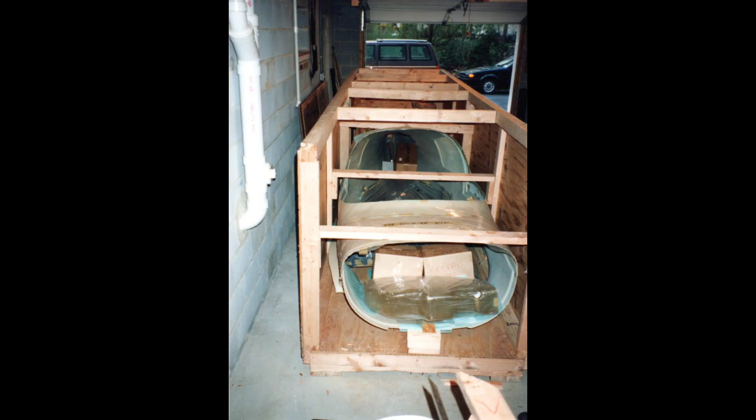So here I am. It's been a couple of decades, a couple of degrees, a couple of kids, and I bought my first Lancair kit. Actually, I bought two kits in January this year, and my early videos showed the journey and the saga from bringing that home, and you get to watch my progress in documenting the airplane and the design modifications and discussions about this famous aircraft, the Lancair 360, that is no longer in production. So during the videos, you're going to be learning about composites and building this amazing super fast airplane.

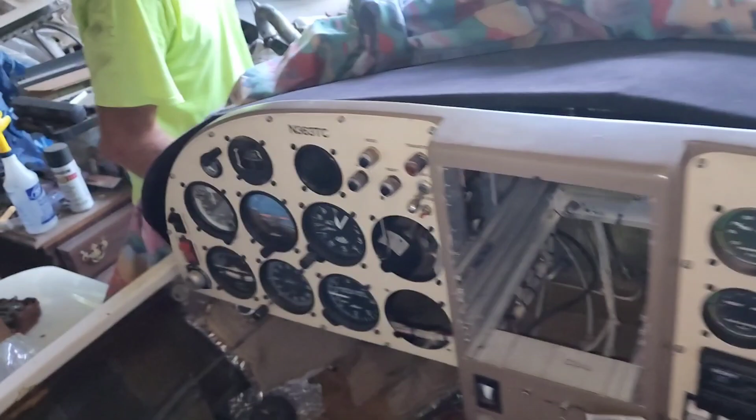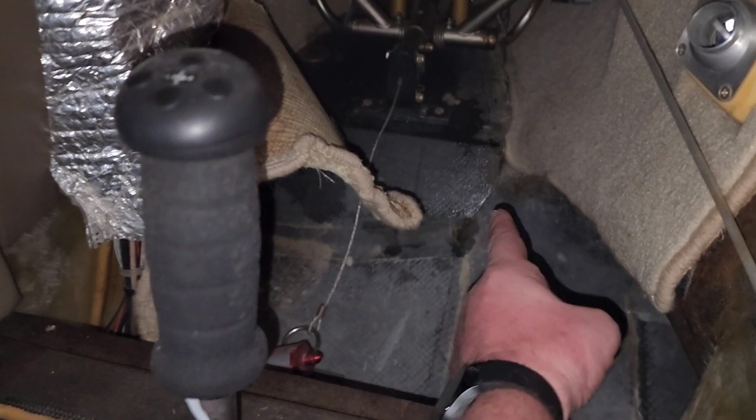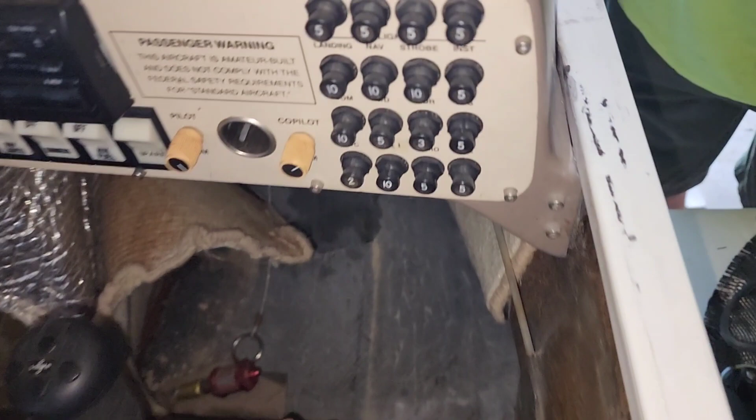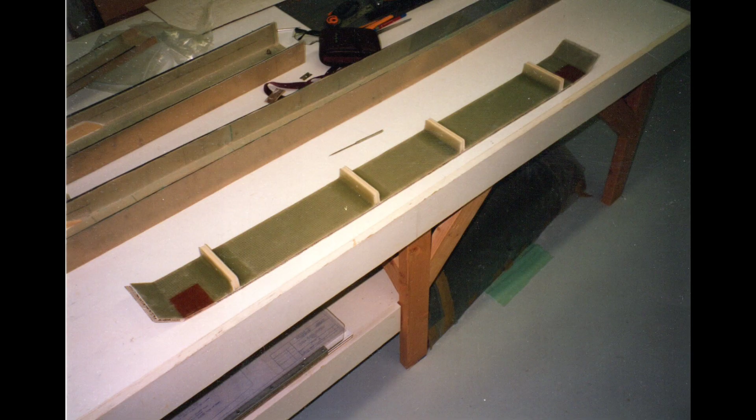But this is a challenging project, and if you've never done anything like this, it can be pretty difficult to do. So I'm hoping that with the videos I can create some excitement around this vintage design that is considered by many in the aviation community to be very much like a Ferrari of the kit plane industry. And if you follow along and you learn how to build one of these airplanes from me, I'm going to try to be very detailed in my build plan so that we end up with a series of videos that would help anyone to be able to build and fly and enjoy your own airplane.

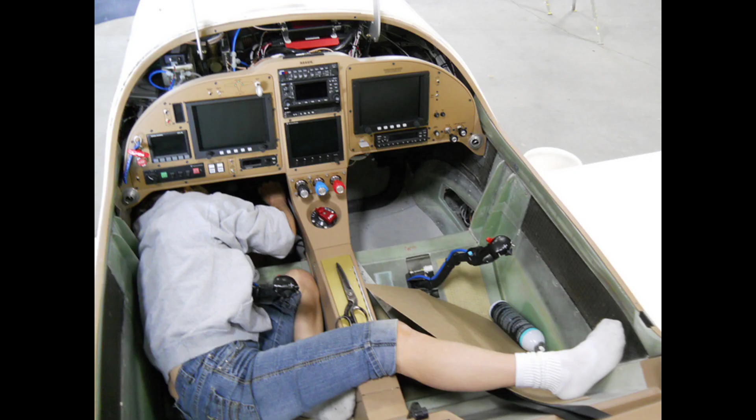One of the big advantages of building your own aircraft is the cost standpoint. It's considerably cheaper to build the kit, but beyond that, because it's an experimental and you are the builder, you are also allowed to perform all of your own maintenance. So that may be intimidating to some, but you can always have an A&P just look over your work. And this means you can cut down on the cost of flying immensely.

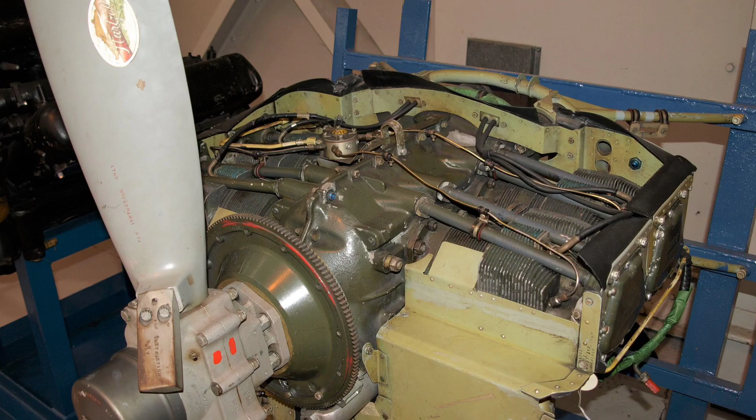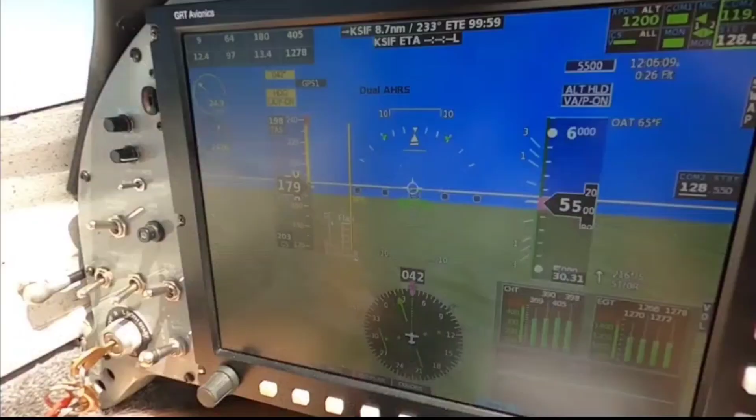And something else that's fantastic about the Lancair 360 is that this aircraft can fly with an O-320 sized engine or a 360 sized engine. And it gets incredibly good fuel efficiency going fast. You can easily get this airplane to fly on about 7.5 gallons an hour at right around 200 knots. The bigger engine obviously has a little higher burn, and people get cruises in the 210 to 220 knot range. And with the 320, if you throttle back, somewhere closer to 180 knots on about a 7 gallon per hour fuel burn. These figures are not exact, and it really depends on how you build the airplane, how true it is, if you have gap seals and lots of other little nuances. But generally, this is an amazing aircraft.

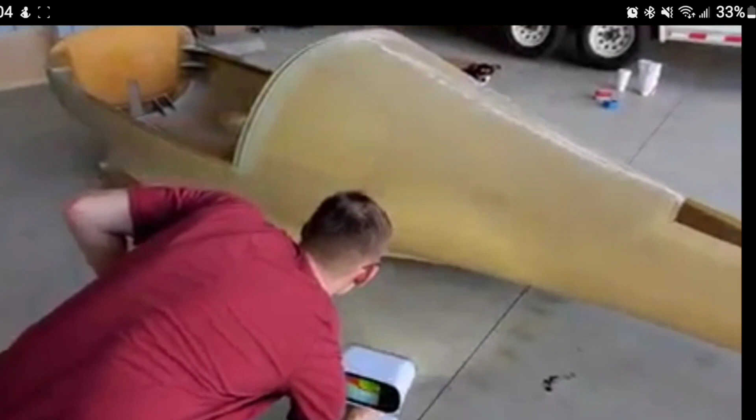My last video covered a high-level overview of 3D scanning using the Creaform HandySCAN Elite Black. For those of you who have been following along, I first scanned the aircraft with an Artec Leo 3D scanner, and I thought at the time that was going to be the right choice for this aircraft because of its portability and some other features. But that turned out not to be the case. So this video is the second part of a two-part series of scanning the Lancair and what I've done with all of the scan data.

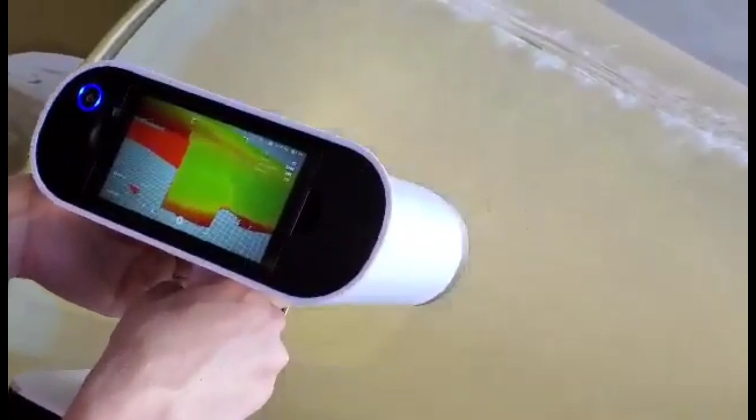So the last video covered how to get the data into the computer, but I didn't spend any time talking about the actual workflow of converting the captured data into something usable in a CAD program like SolidWorks. I also didn't address the fact that the scanner you use and what software can make or break the success of the project. So I'm going to dive into those details.

When I first chose to scan the Lancair, as I stated earlier, I chose to rent an Artec Leo scanner because of the features that it had, and I thought they were important. So for example, the Leo is completely self-contained. It has a hard drive and graphics card built in, as well as Wi-Fi, and does all the data processing right in the scanner. And it even has a screen so you can see what you're capturing without cables. So I thought that was really nice. It's battery powered and you could carry it around, capture all the data. You didn't have to have a laptop.

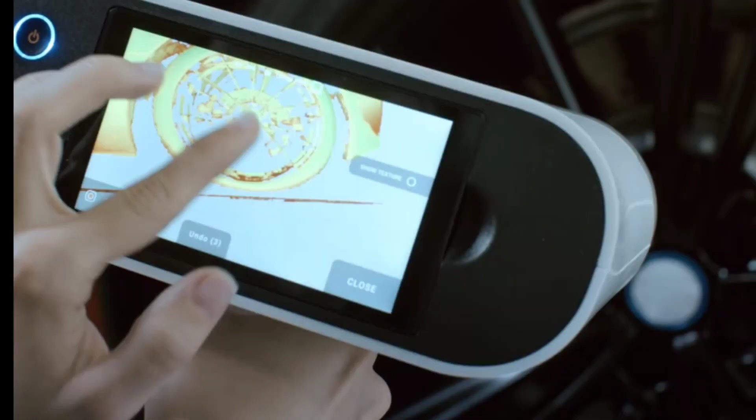And it also captured texture data, which I thought, to be honest, would be pretty cool. And you can see from some of my images here that you do get the data for the images that it scans along with it for the textures. And you can see the serial number inside of the fuselage. So that was really neat. But unfortunately, the Leo proved to have some shortcomings for what you might call metrology grade 3D scanning.

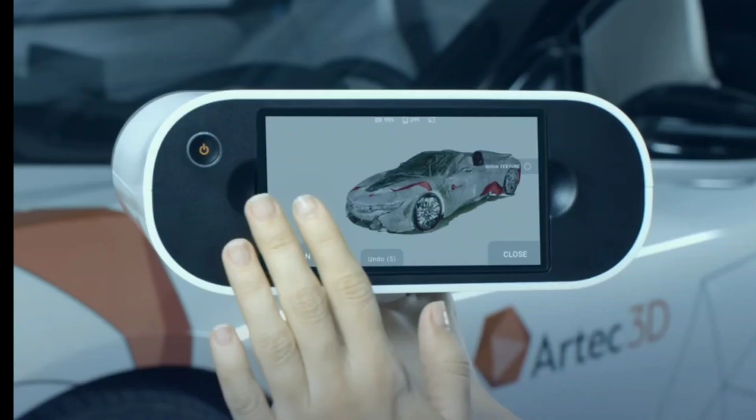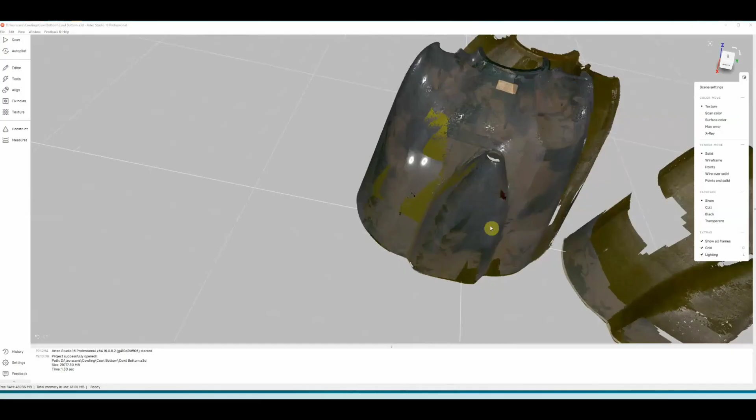The Artec Studio software, on the other hand, was pretty intuitive, but it fundamentally lacked the ability to align all of these multiple scans that I did for the fuselage of the aircraft really well. And that's because the Artec Leo uses texture data to do the alignment. It also turned out that the Leo scanner had something that I can only describe as drift, where it lacked the ability to scan long objects like a wing spar. And that's probably due to the fact that it only uses the texture of the surface that it's scanning in order to stay aligned.

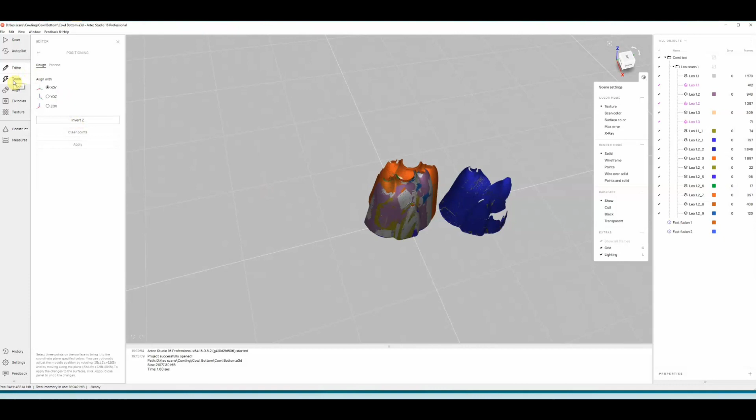It also had a lot of difficulty when I scanned the cowling for the airplane, and walking from one side to the other, it literally lost reference and the bottom half of the cowling was distorted as a result. So what I learned was that the Leo only aligns with the texture, and the software has features that say use targets, but nowhere in any of the videos online or anything said anything about how to use the dots, nor does Artec actually provide anything like that I could find. So it's a little bit of a hit or miss with that.

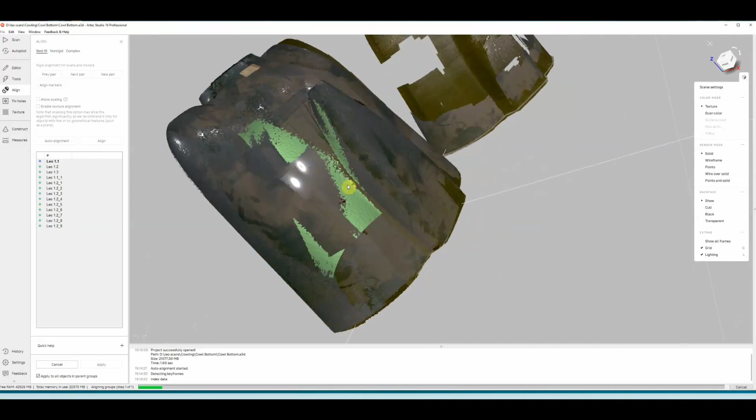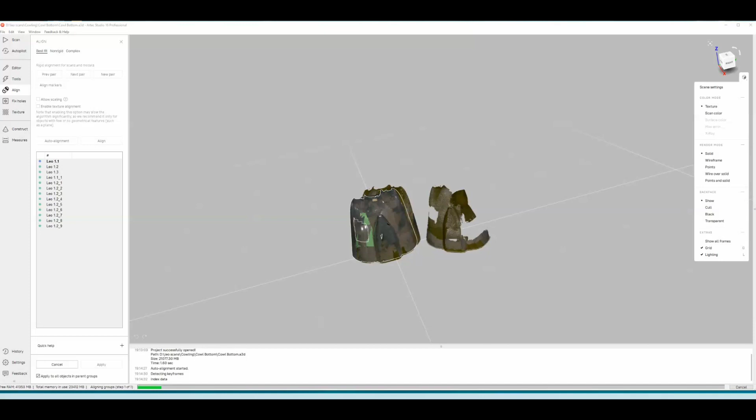And in the end, what I decided was that the features that the Artec Leo had really sounded terrific. Cable-free scanning, wireless streaming of the scan data, a screen to see what you're doing. But in practice, the Leo is good for, in my opinion, smaller objects with lots of geometry, like an engine, for example, or a motor or a heat sink or something like that. Although I did not try it, I suspect that if I used a marker to draw squiggly lines all over the plane, the Leo would have been able to triangulate all those marks and provide better results. But I didn't really want to mark up my aircraft, so perhaps it might also work with targets, but I suppose I'll never know. So that brings me to the software.

The Artec Studio version 16 software is a very intuitive program, but it also has very few bells and whistles. The different alignment methods in the software are a bit cryptic and confusing. As I went through even the instructions provided, I really couldn't make heads or tails about what they really represented. And even as an engineer, a very technically minded individual, I really had a difficult time with that.

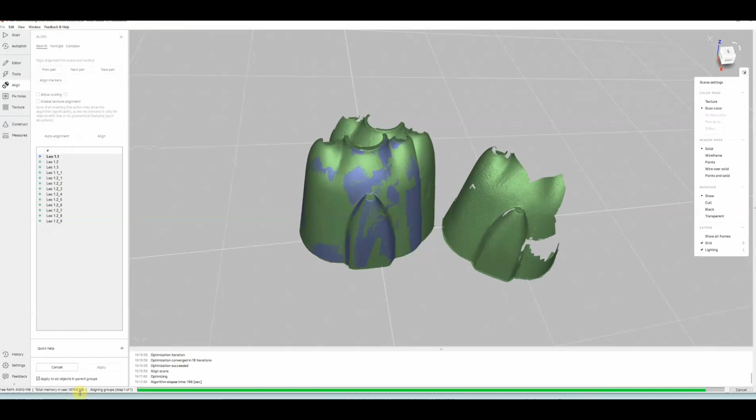And many times during my work, it even made the scan data worse using certain alignment methods that I found in the software. And I had better results manually aligning to get the scans close. And then once you have the scans close, you can click a button to say finish the alignment. And if you get it right or get it close, it'll do a pretty good job of lining them up.

I guess it's comparing all the points that you captured with the points in additional scans. But the bottom line was the Artec Leo or Artec Studio software, I felt like it lacked refinement for workflow, for engineering, and it had challenges when capturing and combining multiple scans.

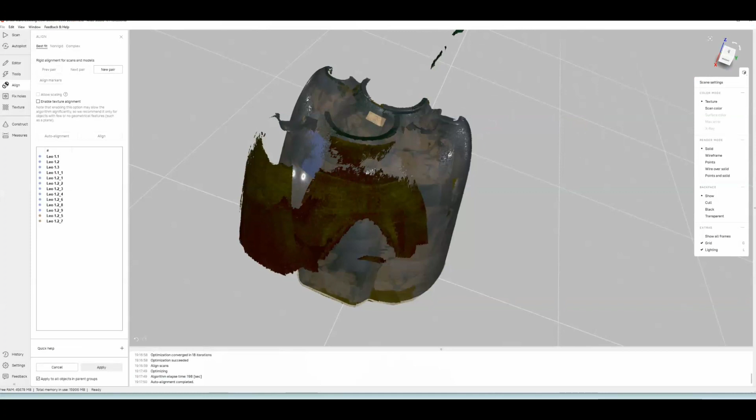And unfortunately, without the use of targets, it loses reference often while you're capturing large objects like the fuselage of an airplane. So I spent maybe a little more than 2 months trying to convert the scan data into something usable in the Artec software before someone online in Facebook suggested that I investigate a Creaform.

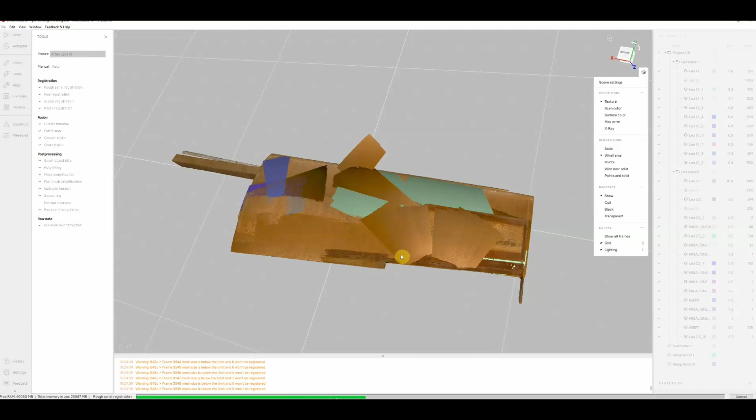In the last video, I showed the scanning process of the Creaform HandySCAN Black Elite, but if you listen carefully at the beginning of that video, I also tried to use the Creaform GoScan before we tried the HandySCAN, and that one also uses texture data, and it encountered the same kind of problems.

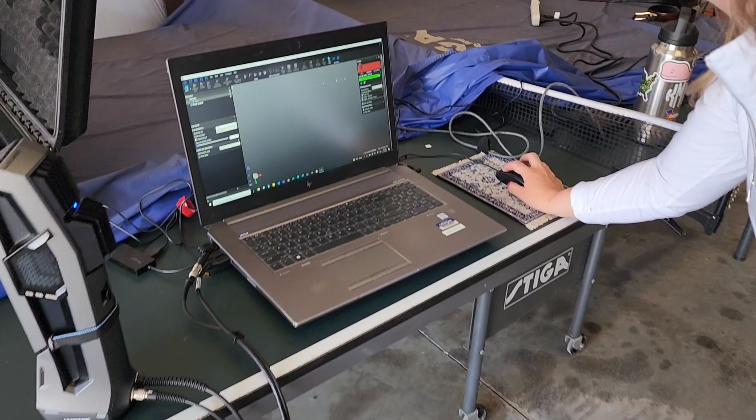And we think, after talking it over with Creaform, that it might be the translucent nature of the fiberglass that actually causes the problem, because the scanner picks up artifacts at different lighting angles by going right through the translucent fiberglass. This was really dominant in the window area.

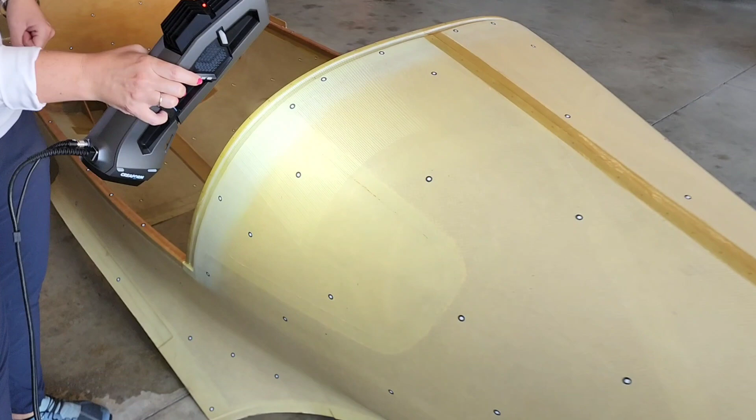We kept getting artifacts when we were scanning, and I resorted to even closing down the door to the hangar in order to see if that would have an impact, and it did. But ultimately, after a bunch of attempts, we had to switch to the HandySCAN, which is a completely different animal, and it's a laser-based capture device, and it's considered to be a metrology grade 3D scanner.

So with that, we basically made the plane look like it had measles with these dots all over it, because the Creaform HandySCAN Black Elite scanner only captures the reference points that are presented from these targets. So they have to be put all over the plane, and they have to be in random patterns so the software can figure out and triangulate strictly off of those.

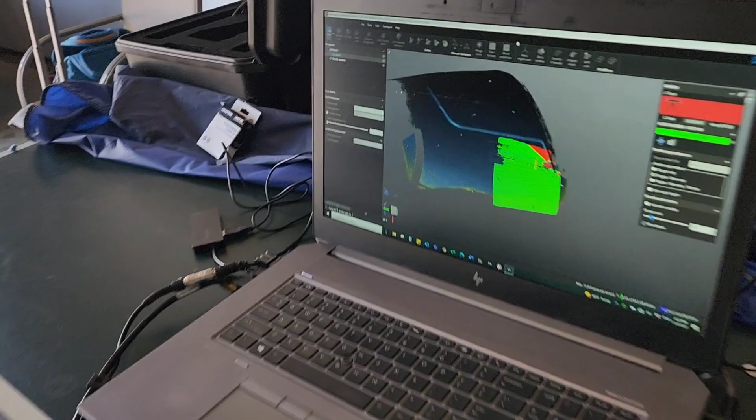VX Studio and VX Elements are Creaform's software for post-processing. In part 1 of the video for 3D scanning, you could see that the results of the HandySCAN Black Elite from Creaform performed flawlessly, and we ended up with a beautiful model that I could use to create surfaces in their software in order to do modeling from.

So VX Studio and VX Elements are Creaform's software version of the Artec Studio software for post-processing the 3D scan data. And as I mentioned, someone suggested that I try this scanner and software because it was far better than the Leo software, especially when it comes to surfacing.

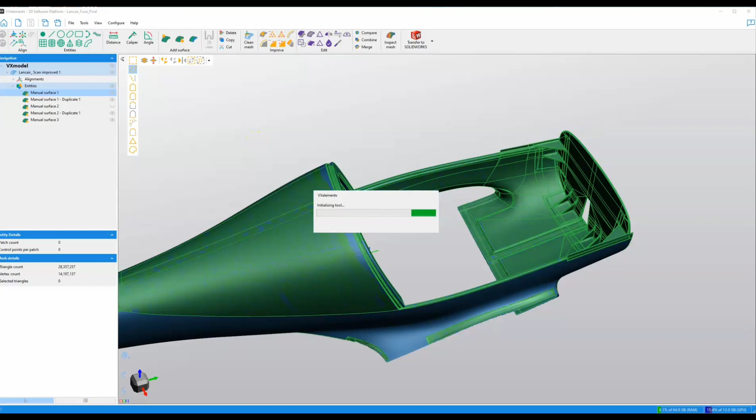Now, surfacing is the process of taking 3D dots in space, which is what the 3D scanners capture, and converting it into a mathematically derived surface that goes through all of those points. And this is required in order to do any CAD modeling off of the model that you capture. So what you end up with is not a bunch of points in space any longer, but a mathematically derived surface that flows through like an average of all of those points.

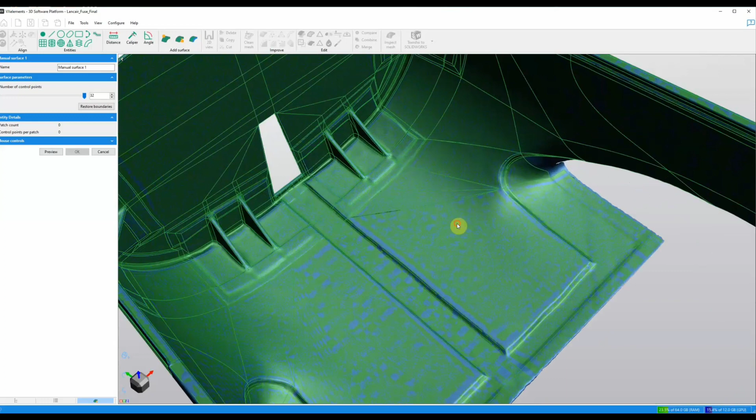And that leads us into the question so many people are probably wondering: why I did all of this scanning. I hinted at this in the middle of the first video, and I'll go into more detail in a subsequent video where you'll be able to see how I used all of this scan data to do customizations on the design. But at this time, we're just going to focus on the software and the post-processing, because I feel like that's something that would benefit a lot of people in the aviation community.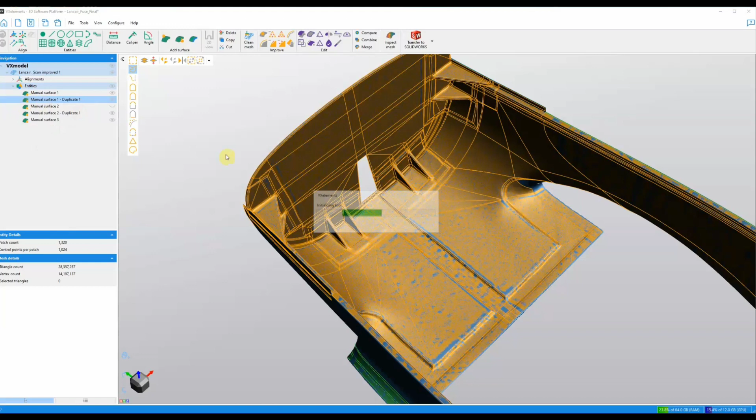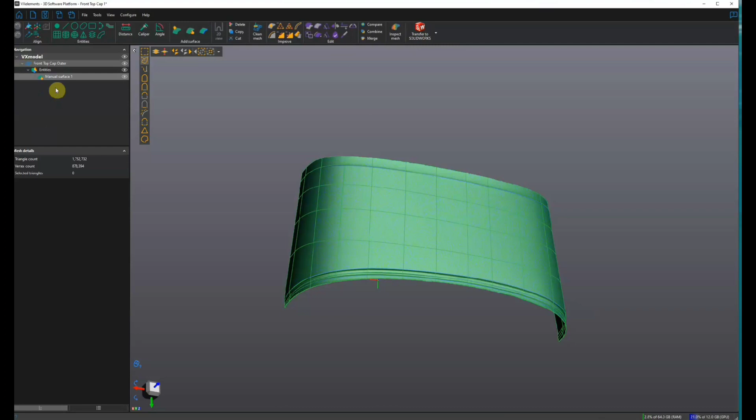So after a short learning curve in VX Elements, I was off to the races creating surfaces. I found that there is a tool for automatically creating surfaces, which I tried to use at first because I hoped that it would create the surfaces that I wanted, but it just could not get the fuselage right. I realized I'd have to use the manual mode because automatic surfacing just couldn't pull it off. It actually creates hundreds or thousands of these little patched surfaces, and it just couldn't manage all the complex curves of the fuselage.

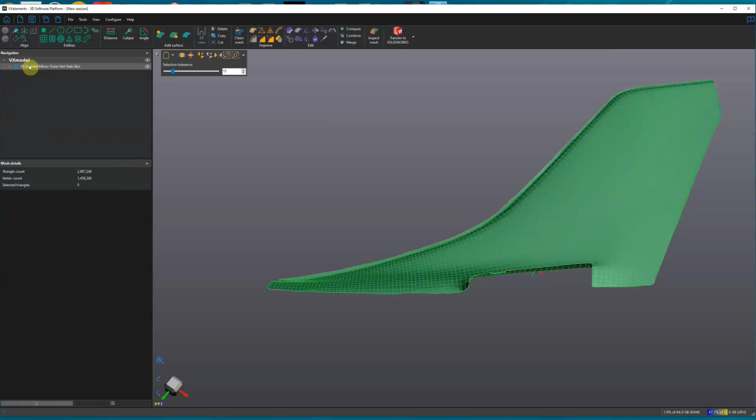So it probably would be ideal for something like a car hood or something, maybe less complex. But scanning both the inside and outside of a complex object like the fuselage of the Lancair, I found that manual surfacing was really the only way to get what I needed. And I did encounter some errors as I pushed this software to do more complex geometry in manual mode.

The problem I encountered with manual surfacing was that after saving my progress, sometimes the software would fail to let me continue. You could exit your progress and then come back in. And even though you could open the file, you just wouldn't be able to drop back into the edit mode where the progress had been saved. And it turned out that I was able to keep moving forward by just duplicating the surface as a new object, but trying to re-edit the old data would just make the work disappear.

So I made Creaform aware of this, and they have assured me that they'll be working to resolve this in an upcoming release. Another amazing feature that I found with the VX Elements software was surface and primitive object creation for reverse engineering. And this is probably useful to a lot of people.

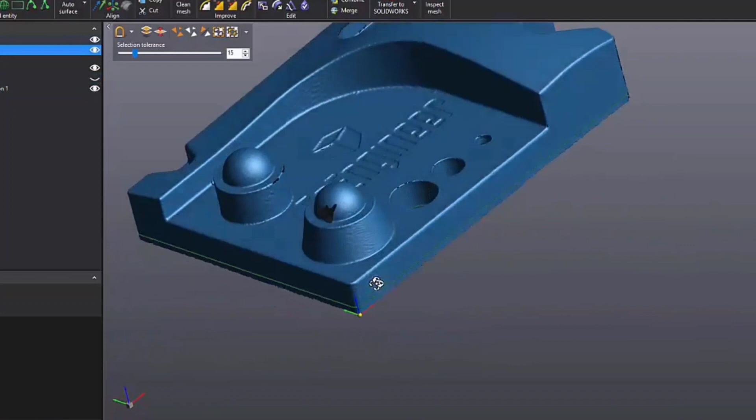There are videos on YouTube that show this process, but I felt like none of them really explain exactly what you do with these tools and how you combine them with cross-sectional data to reverse engineer an object well. So I'm going to provide some examples of how these tools work for scanning something complex like an aircraft.

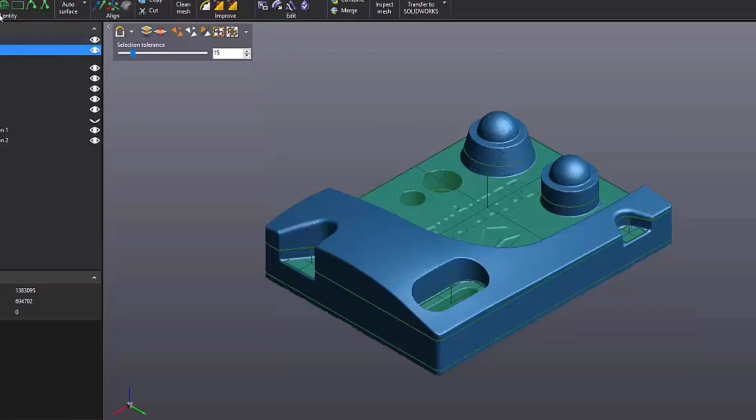So for example, someone recently reached out to me asking about scanning the cabin of a Cessna 172 without the instrument panel installed in order to determine the location and space for all the hard points for mounting an instrument panel. Likewise for door panels and other interior trim. And this would be very easily accomplished with a scanner like the Creaform HandySCAN Black Elite.

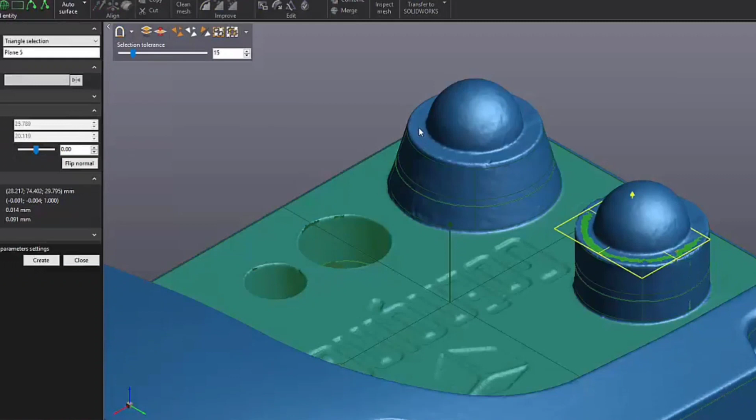And then being able to quickly create planes where those surfaces go for mounting and where bolt holes go, and also being able to create simple objects like tubes and flat surfaces, so to create reference points for the mounting hardware.

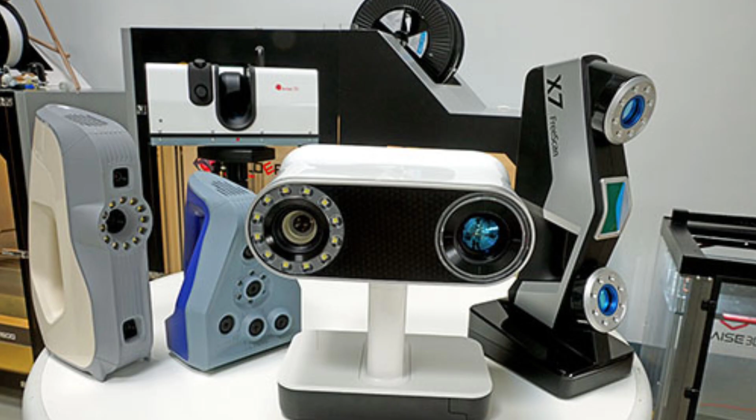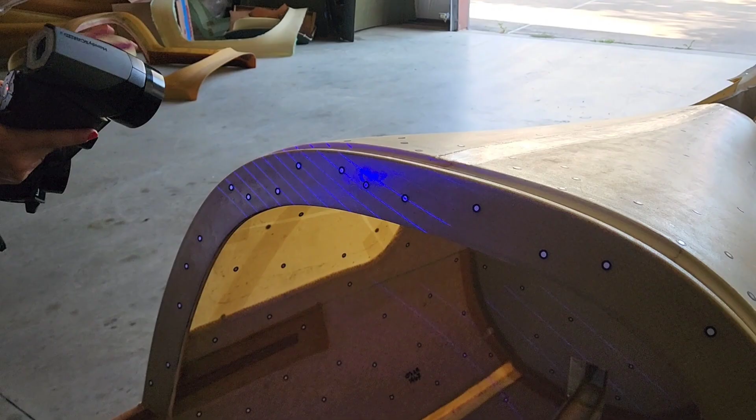So my research and actually doing the scanning led me to understand that there are a lot of different scanners from each one of the scanner providers, and the scanners are all designed to fill certain gaps in scanning processes. Some are designed to capture high detail in very small envelopes like on a tabletop, but those are ineffective at capturing large areas. Other scanners can capture medium-sized structures like the Lancair fuselage or a boat hull.

But they have other models which are designed to capture even larger objects like the outside of, say, a jumbo jet. And even beyond that, there are 3D scanners designed to capture entire buildings or like inside of a petroleum plant, or what I would call architectural scanning.

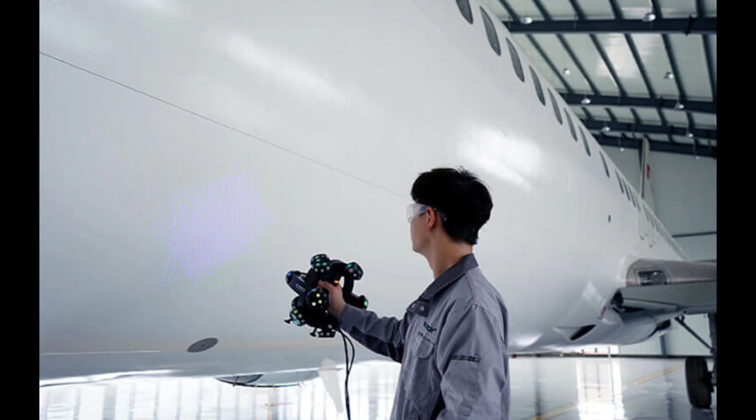So in the end, after all of this, the fun part is that 3D scanners can be rented. Depending on the model, you can usually find them for between a few $100s up to $1,000. The Artec Leo that I first rented was about $500 a day, while the Creaform HandySCAN Black Elite, I think, rents for slightly more, like maybe $600 a day.

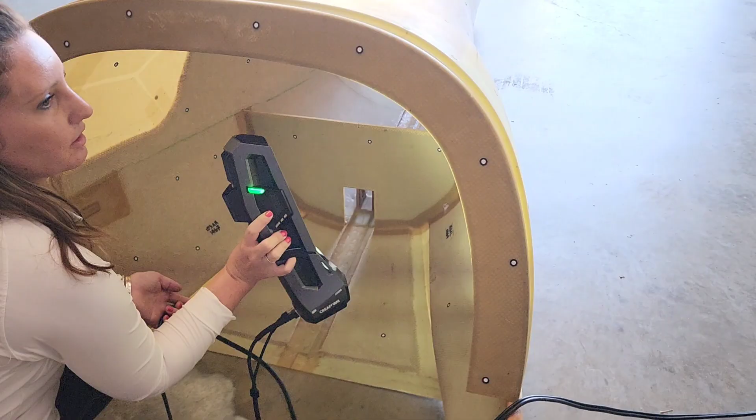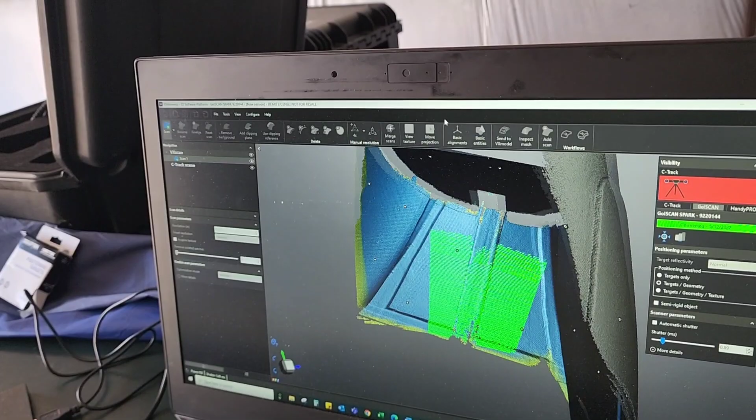And that said, the rental places don't really treat a day like you think. Most renters consider the next day to be the full day. So if you pick up the scanner at, say, 2 p.m. and go start scanning on a Wednesday, you would have all afternoon, evening, and night, and then the entire next day to do all of your scanning. And the company that I rented the scanner from even said that it was acceptable to return the scanner the following day as long as it was there by 8 a.m.

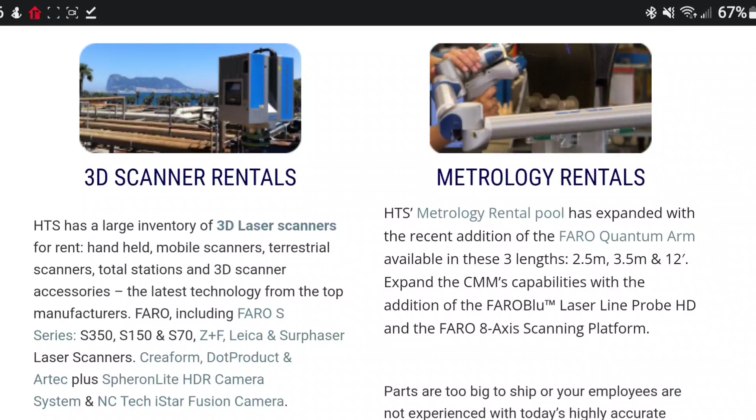So that means you could realistically have the scanner for like 36, 38, 40 hours for that single charge, which is pretty reasonable, I believe. It came out to something like about $16 an hour. That's pretty cheap in my book.

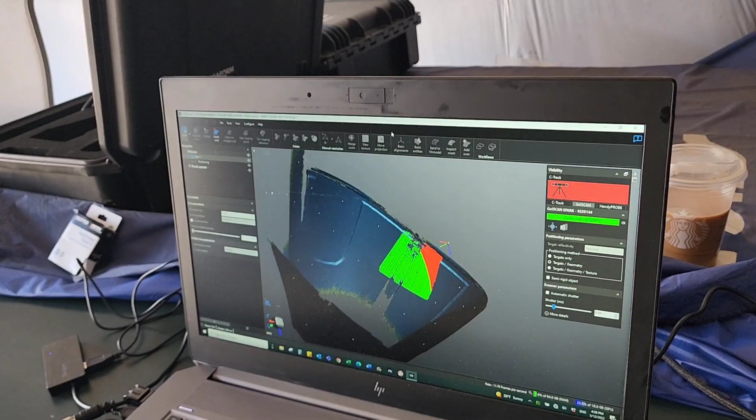So the hard part is that not all cities might have a place for you to rent a scanner from. So you need to locate a rental company. Most places that do rentals will usually ship the scanners out, meaning they can FedEx the scanner to you. It'll likely arrive in a Pelican case along with a laptop that has the capture software pre-installed and the charger cables.

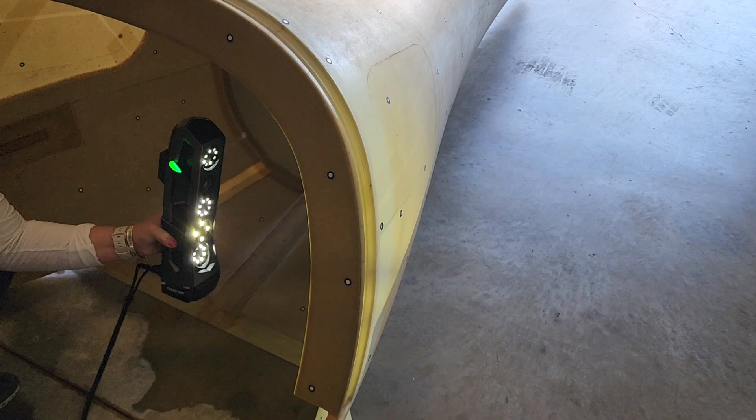And the learning curve really isn't that hard. You could figure it out by going on the internet and just watching some YouTube videos. And the post-processing is what takes a bit more time.

So you should work with your scanner supplier to ensure that they'll give you a license on loan after you do the scanning, so you can install it and post-process the scan data on your home computer. Trust me, it will take some time to do the post-processing. Even if you hire someone to do it, both Artec and Creaform worked with me to have software at home to post-process the data. Otherwise, the rental would be futile, in my opinion, for anything other than very small projects.

So lastly, in my opinion, there's a financial aspect to consider when you rent a scanner. You either get what they call a commercial rider insurance policy that covers the total loss of the scanner while it's in your possession, or you have to take total responsibility yourself for the rental. I think that that's kind of a scary proposition for a $65,000 scanner like the HandySCAN Black Elite, along

with the $3,000 laptop. So this was probably the most challenging thing I worked through at the beginning, trying to find an agency that would do what they call the commercial rider policy for just a few days. That turned out to be really hard. Most of them want to do it for a month or do it for 6 months or a year.

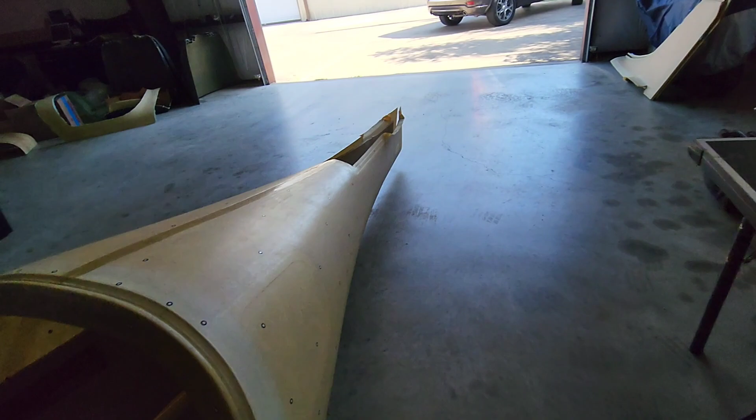But after searching for a few days, I finally found a company to provide a commercial insurance rider online, and the process was really straightforward and simple. I think in the end, it only cost me around $50 for coverage for a week.

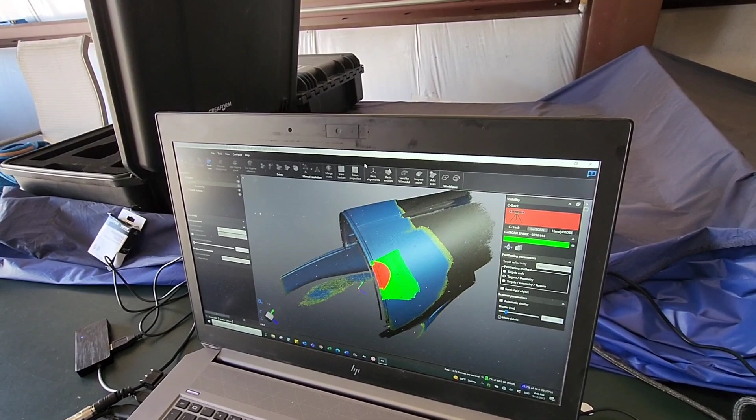It was super easy. I applied through their website, provided the make, model, and serial number of the scanner, and they treated it like a piece of surveying equipment, which is what they felt was the most equivalent to. And I kind of explained to them what it was, and they probably are going to add it to their repertoire of things online.

I found it by looking up rider policies and looking for industrial equipment rentals, because people rent things like forklifts and backhoes and stuff like that all the time. And I found a company that did rider policies for rental surveying equipment.

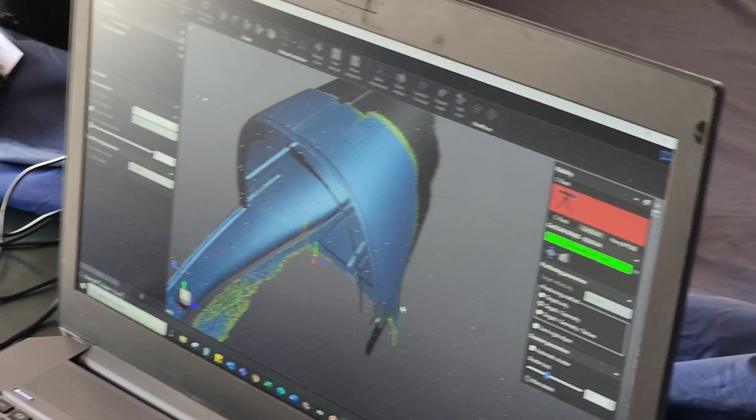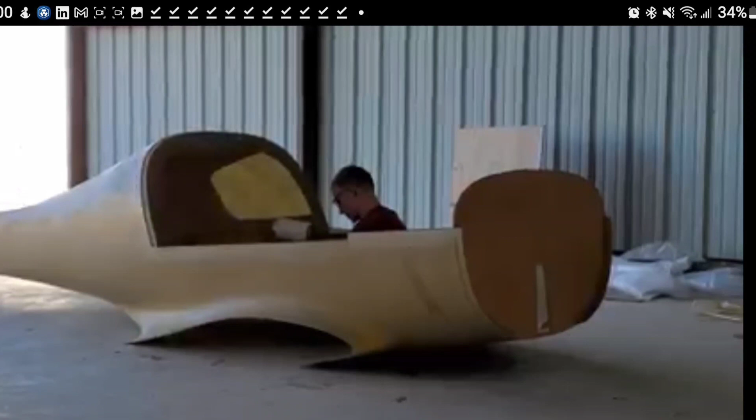So I picked up the scanner the same day that I did the rental at about 1 p.m. that day, and I was scanning by 4 p.m. I scanned with the help of my son late into that night and packed up and returned the scanner the following day. So we had that night, the full day, and then I came back around 9 a.m. on the second day and scanned all day to get all the objects that I wanted. So my project was perhaps larger than a lot of people's would be if they were just after one object.

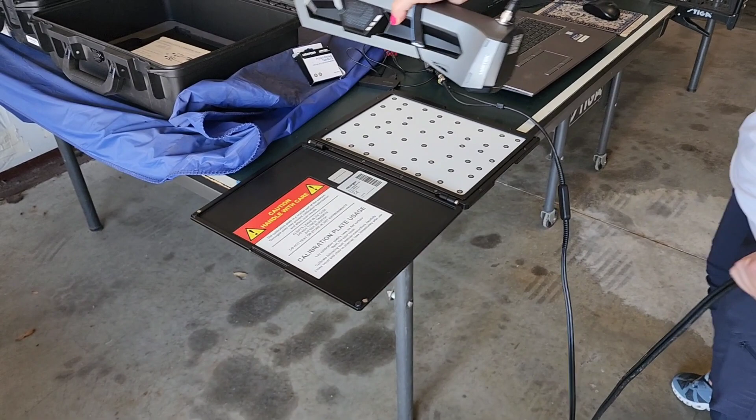And then I drove and dropped off the scanner the following morning to the location by 8 a.m. I was waiting, and they took it back. There were no issues. And then they gave me a copy of the software to do the post-processing.

It's not a piece of cake, but if you're able to play video games on a PlayStation or use your cell phone for more than phone calls, you can probably figure out how to do the scanning. Of course, there's a lot of other videos on scanners and manuals online too, so I would recommend that you do your research ahead of time and plan ample time to scan.

For the Creaform HandySCAN, you must have targets, and the renter should have these available, and they do cost money. I think they're like $40 a box. There's like 5,000 of them in a box, or 1,000. And I would argue that you should not skimp on the dots. That'd be the worst case scenario where you rent it and you get poor scan data because you skimp on

the dots. You should have something like 3 to 5 dots in any given 1 foot patch of surface if you want to remain really accurate. And they should be in complete random locations, not regular patterns or intervals. Of course, other Creaform products don't require the dots, such as the GoScan, which we attempted first, but we really didn't have success with that on this object.

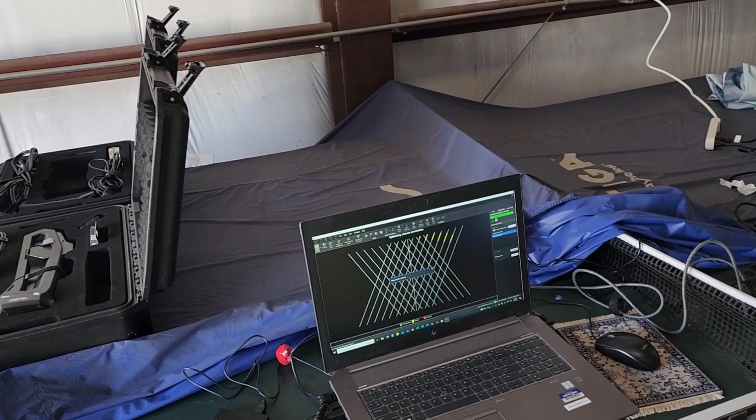You should also talk to the scan location about the best choice of scanner for your object. I'm told that the Creaform HandySCAN Black Elite will scan even chrome or glass objects because it's laser based, so you might want to consider that instead of other scanner types like texture-based ones.

But in the end, just be prepared to contort your body into all kinds of positions you didn't know you could do, and you might be sore the next day from it. I know I was. In the end, the experience of doing the scanning was really great, and I learned a lot and obtained extremely accurate data of the Lancair.

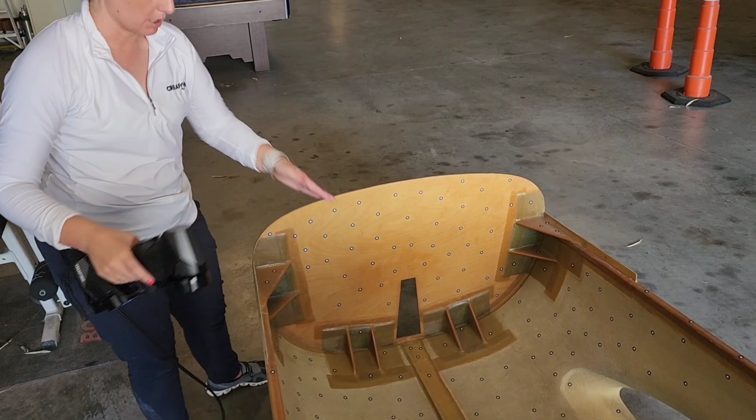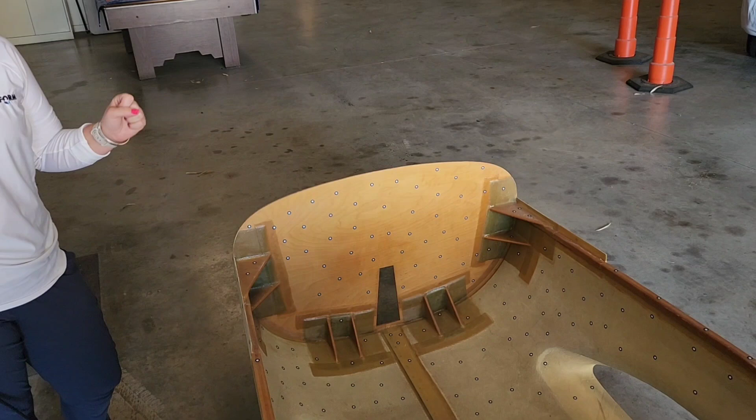If I had to do it all over again, I'd make sure the scanner I rented was optimal for the size envelope of the object I wanted to scan, by explaining to the rental agency what I'm scanning. Keep in mind translucent objects can be a challenge with some scanners, especially ones that capture texture. Fiberglass, like the Lancair, didn't seem to like either the GoScan or the Leo, and expect to spend between $500 and several thousand dollars on the overall project and rental.

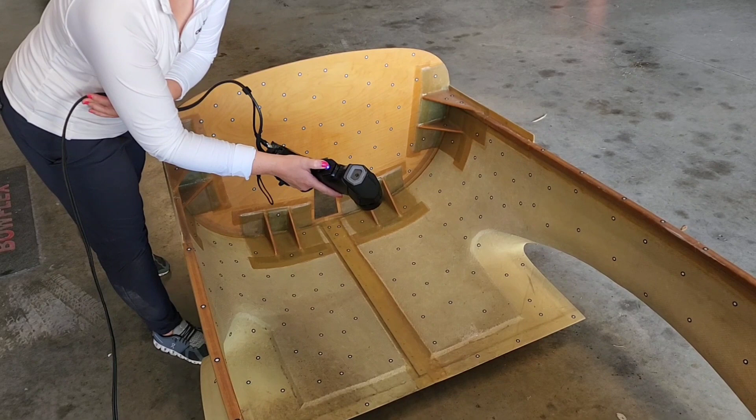If you're having it shipped to you, I'd argue you should use FedEx Red same day or FedEx overnight with guaranteed 10 a.m. delivery to save money by reducing your rental period. And if you live in a big city or near one, it might be easier to locate your scanner in that city and do the work locally. I live in Houston, so I had access to both the scanner in town and the hangar.

I hope this video has been helpful and that you've learned that you can get very accurate CAD data to help with your project.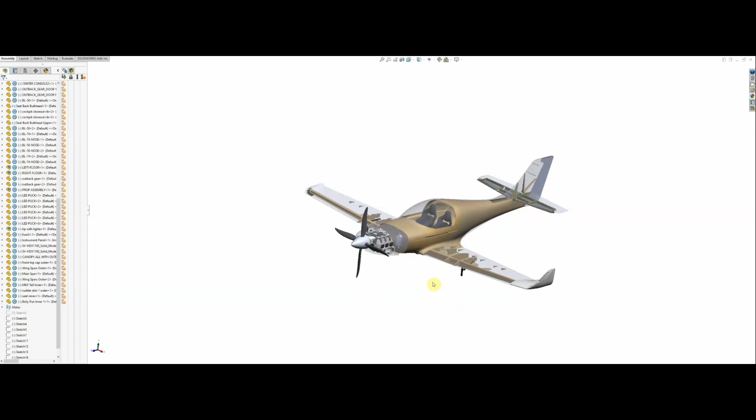Next up, I'll be doing a video about the actual use of the software and how you can generate primitives, hard points, and surfaces for reverse engineering. I'll also do a segment about turning the CAD data into tooling molds for carbon fiber parts.

I personally don't have a CNC router table at home, so I'll be using a 4x8 foot CNC tabletop router at my local makerspace to cut the tooling board for my molds. This was easier than the scanning because makerspaces offer classes and help, as well as providing software in their shops. Some makerspaces also have 3D scanners, so you might want to check out your local hacker or makerspace to see if they have one too.

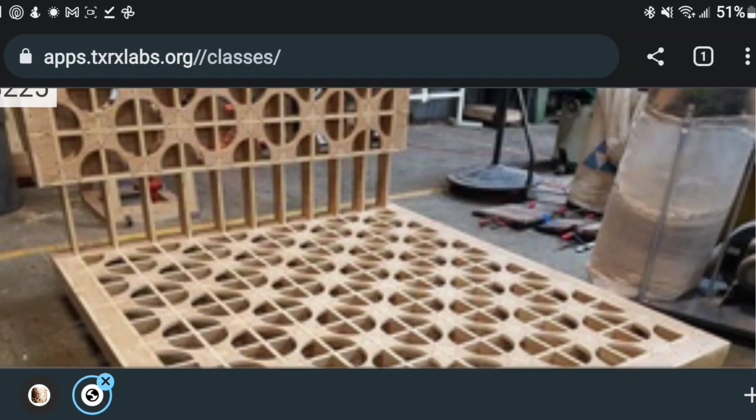I realize this video is very technical and not everyone may have the skill set to do the work themselves, but luckily I covered that too, or maybe I'll cover it in my next video. As always, if you have any questions, please feel free to drop them in the comments.

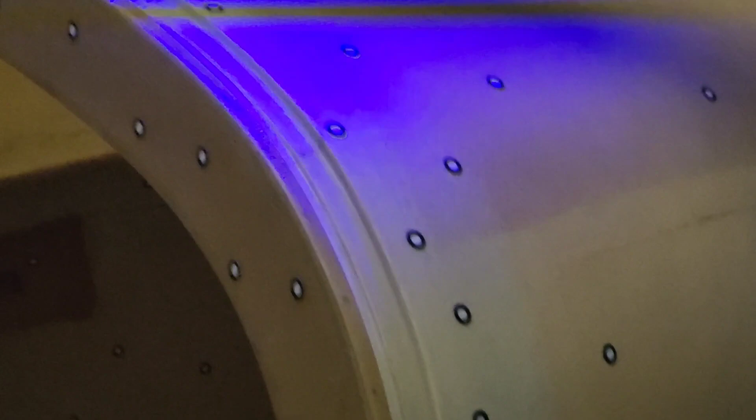Most rental places also offer scanning as a service for a fee. So if budget isn't as critical, you can hire their technicians and they can do the scanning for you. You won't need a commercial rider policy to cover damage or loss because the technician will be in possession of the scanner. And yes, they're accustomed to traveling to sites to do the work—they'll get on airplanes, go do the scan, stay in a hotel, whatever you'd like. But these are additional expenses.

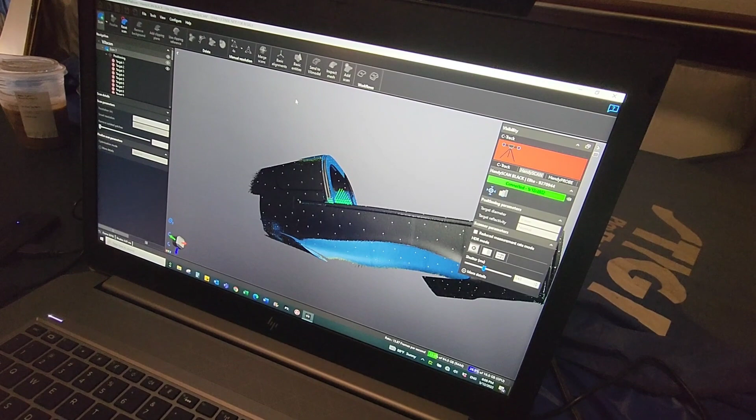You can also bring the parts to their shop to be scanned in-house, and the data can be provided back to you on a portable drive. Basically, there are just lots of options here.

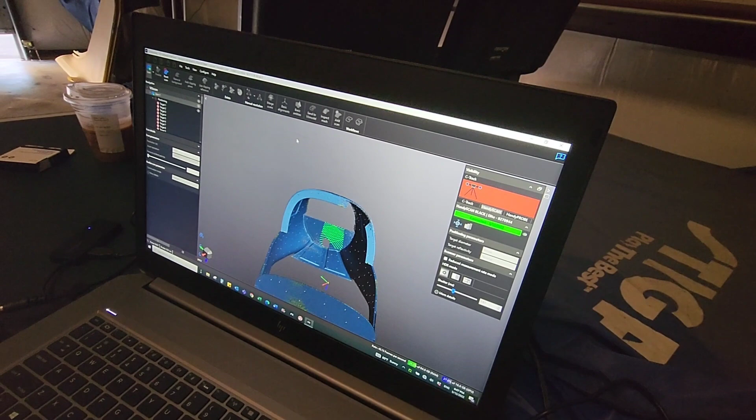I did this work because I wanted it for my project and for posterity, to preserve the Lancair 360 since it's technically out of production and there are a lot of kits out there, but many are missing parts. So a lot of people spend time on websites bartering, trading, and buying parts. Some of them are difficult to reproduce, and frankly, I wanted to do a lot of modifications to mine.